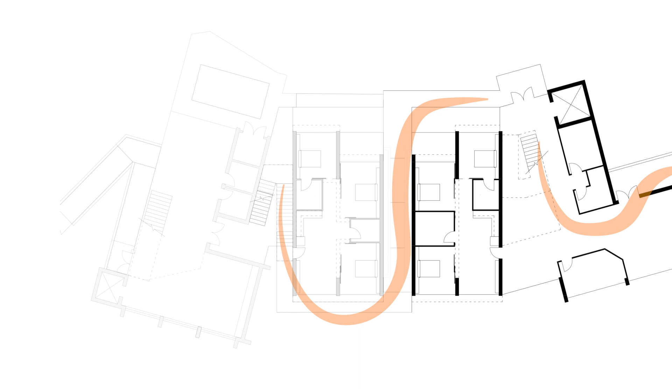It's a simple way of unknowingly greeting those individuals coming to the site and welcoming them back to their homeland. The project houses two different portions, a residential portion as well as a community center.

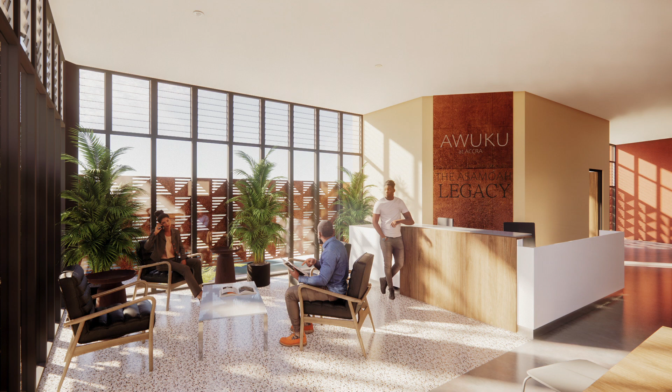The residential portion consists of two individual buildings. The main building houses the main office as well as support units for the residential portion, including a mailroom and washroom. It also houses one 3-bedroom unit as well as a 2-bedroom unit above. The second building has on the ground floor a 3-bedroom unit and above that a 2-bedroom unit, with each unit having a terrace.

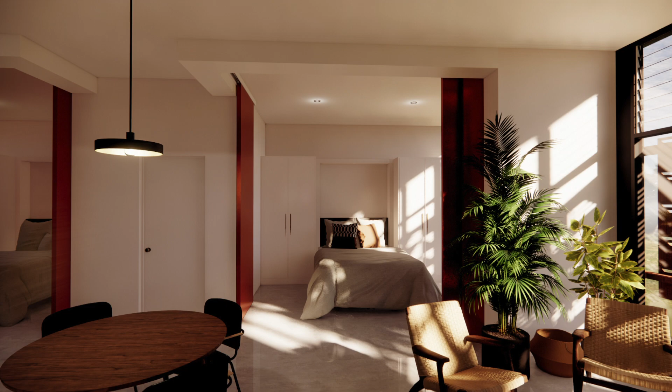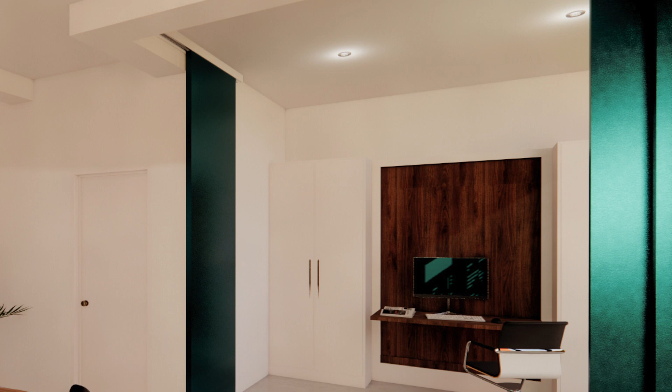One thing that was very important within these housing units was to take into account the culture of Ghana, which has an atmosphere that is very warm and vibrant. In the residential units, there are barn doors that can be opened to open up the space to accommodate more people, bringing that community aspect into the living spaces. To fully utilize these spaces, all furniture, with the exception of living room furniture, is built in. This means the beds are Murphy beds, and all storage units in the bedrooms are built into the wall. This allows the bedrooms to be utilized as offices to work from home, which also encourages commerce and small businesses to begin.

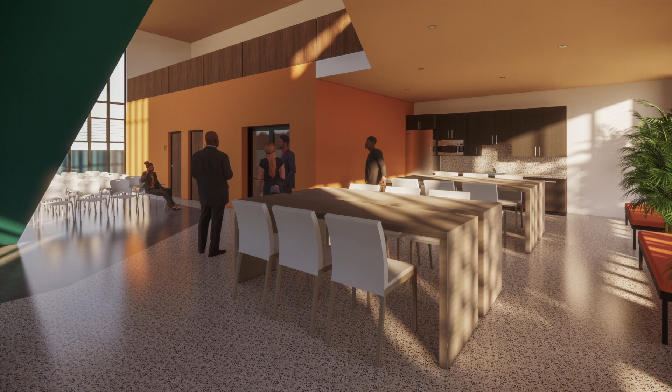On the ground floor of the community center, there is space allocated to lectures, as well as a community kitchen, and there is event space on the ground floor and on the second floor balcony, which overlooks the lecture area. The sustainable design solutions I incorporated into this project began at a stage of hand to paper sketching in my notebook.

I was trying to figure out how I could truly incorporate these elements into a tangible, visible, and experiential design element. Ghana has an extremely different climate than what we're used to here in America. It consists of two different seasons, a wet season and a dry season, and with both of these there are challenges that designers have to accommodate.

To start, I thought about water collection during the rainy season. The rooftop rainwater will be collected throughout the rainy season. The water collected will leave through a scupper system, falling into planters suited to filter the water as it falls downward towards cisterns below. This stored water provides preserved plumbing features that can be utilized throughout the dry season.

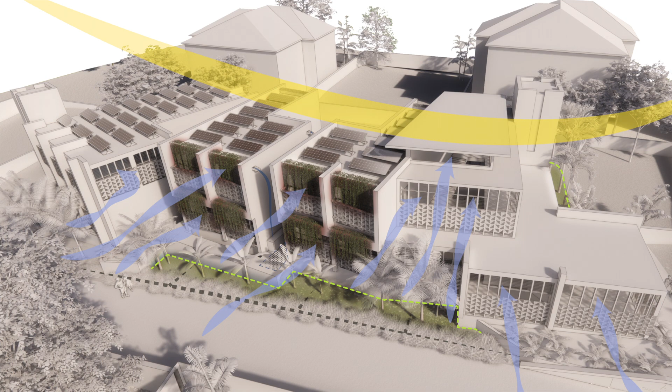In addition, there are multiple bioswales placed throughout the site, which also take into account stormwater management. The area around this project site has very little city infrastructure, so as a designer I had to take the responsibility of deciding how I would address that independently within the context of my site parameters.

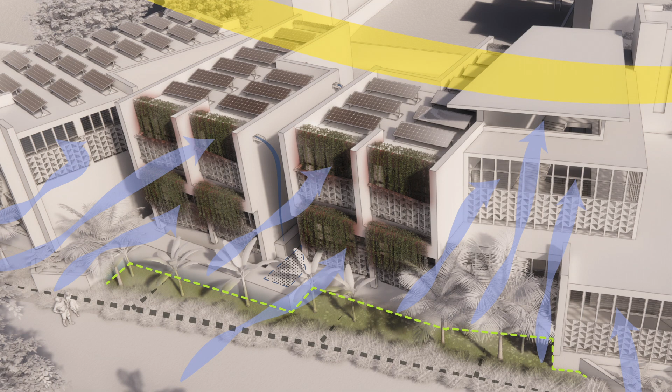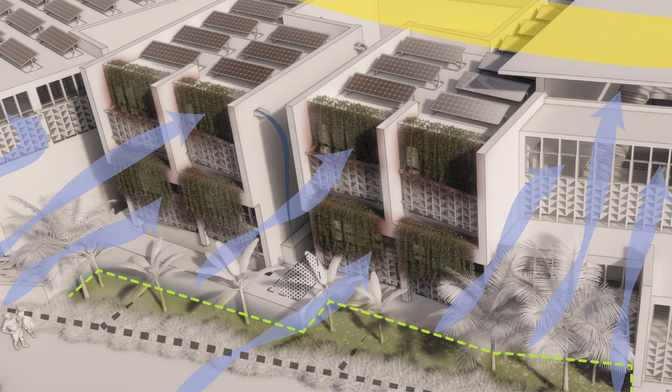Now looking up, we think about the sun. How can we draw energy from the sun? Solar energy is captured by 36 solar panels placed facing south on the rooftop of the residential as well as the community center building.

Natural ventilation is very important to take into account in this climate of Ghana. The upper portion of the window design allows for natural air circulation through a manual louver system. In the residential units, these windows allow for cross ventilation of each unit during the Harmattan season, the dry and windy season. The unit windows are accompanied by an overhead planter box; these plants allow vines to grow down, acting as a natural filter to remove and collect dust and debris. This eliminates the need for an HVAC system throughout the main atrium and administrative wing.

This project has truly broadened my perspective of the responsibilities of an architect, beyond the borders of our country and into a global idea of what architecture really is. I'm incredibly grateful for your consideration, and extremely appreciative of your initiative to diversify the designers of our future built environment. Thank you so much.